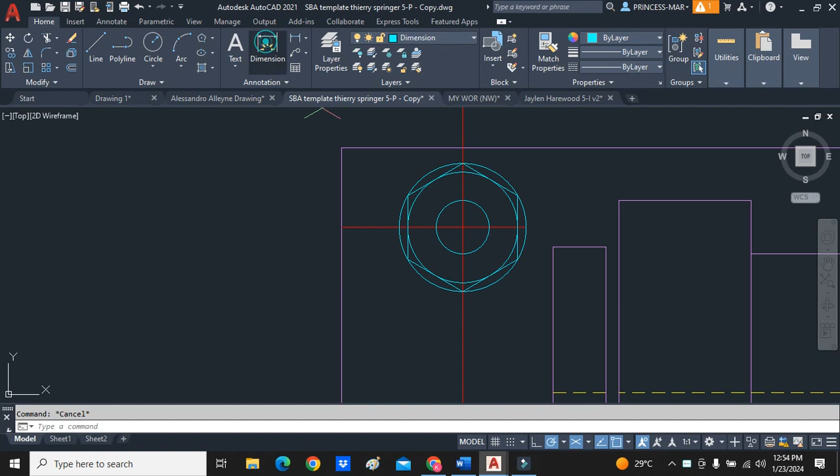The next thing is these are the center of where this hole is off. You have it here at 23 and then 15 coming down. I would probably prefer you to do a 15 and 15, or 15 by 15. Let me change this dimension.

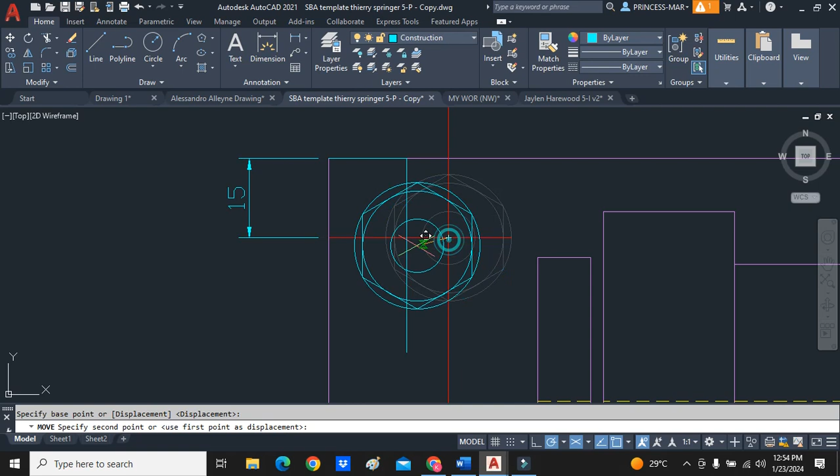All right, so we come over here. I'm going to come across 15 and bring this straight down. So we just move this. You're still watching, Terry? All right, so I want that over there 15 by 15. It actually sits good there. This actually looks pretty good.

Now this circle here is for what, Terry? What's that circle for? Washer? If that's a washer, I will probably like your washer just to be a little... should I want it bigger though? Actually, no, I'll draw it in the front view.

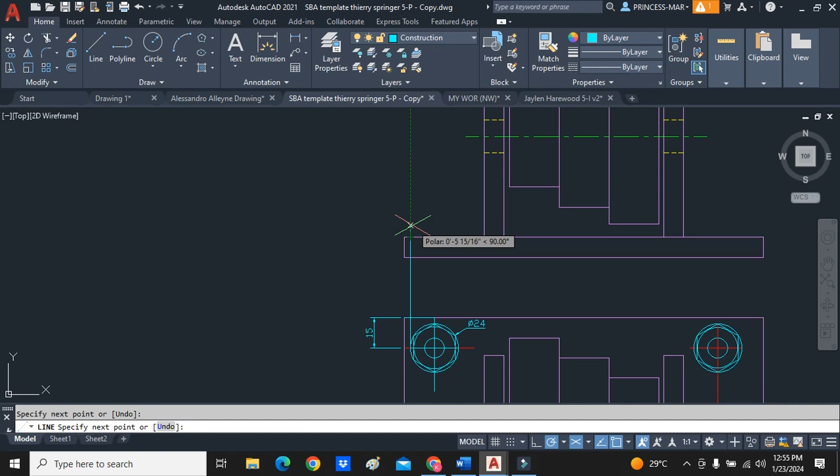So you have it at 24. Pay attention, guys, pay attention. So when we come up, your washer should be up here. 2 millimeters is a good measurement for your washer.

So I have just projected up the washer and we trim. You understand that so far?

All right, so anybody else who has submitted work, pay attention please. If you have submitted work, pay attention because this will be helpful. So now we're drawing a nut.

So you need to project up the top of your nut, and just going to draw this line here along. So we extend up the center as well. And we extend up this edge here.

So the reason that I am clicking here and then drawing the line up long is so that I can trim this one time. So I can just delete that.

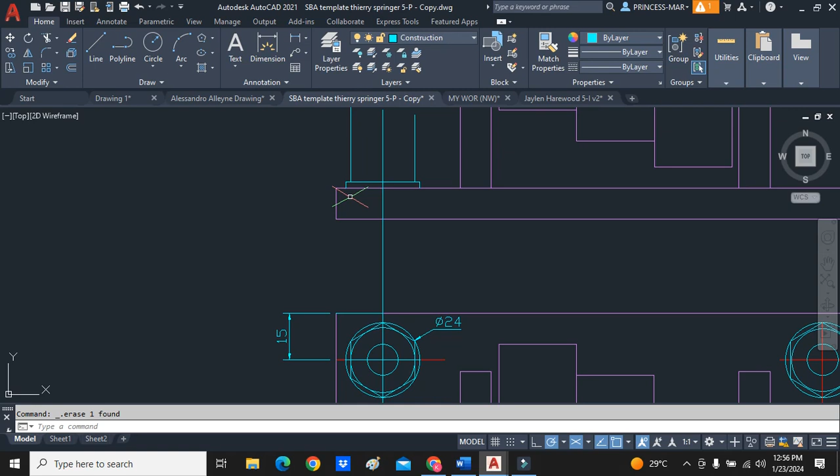All right, how high is your nut, Terry? What's the height of your nut? You don't know? So, all right, we'll try to offset it at 5. Pay attention please, for those persons who are behind. And if you have submitted your work, just pay attention to what I'm doing.

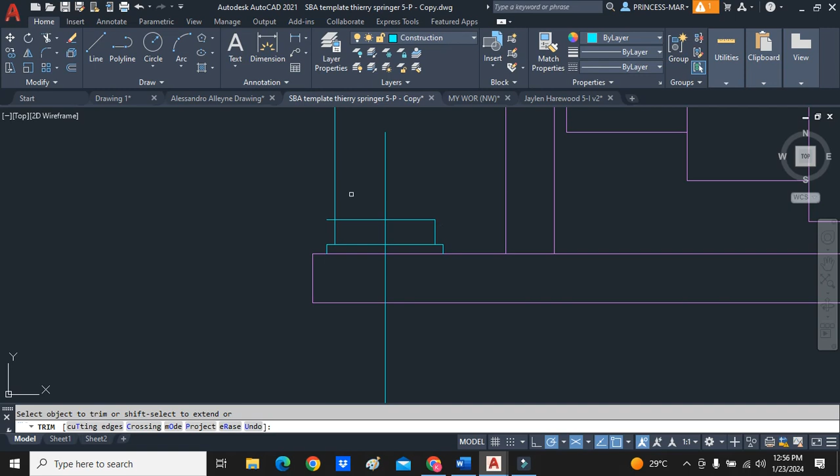All right, so I have drawn the height of this nut here at 5. It looks a little stumpy, but that's not a major problem. Let me just dimension here to the left. It's important to know these dimensions just to make sure you're going right.

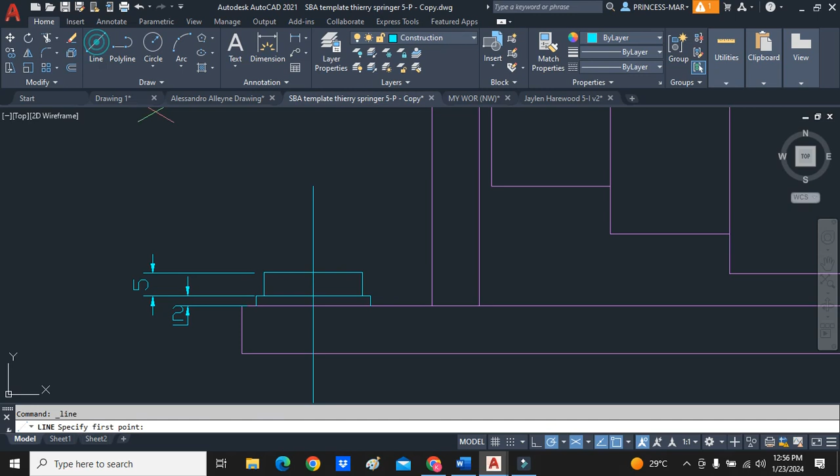All right, so now we're going to draw the bumps. Redraw this line, draw it to the center, then draw it across, and then we're going to offset 1 because this is a little low.

And we're going to do a 3-point circle in here. Left, right, 1. Nathaniel, you following? Left, right. Here, will you following? So please watch because your work has been submitted.

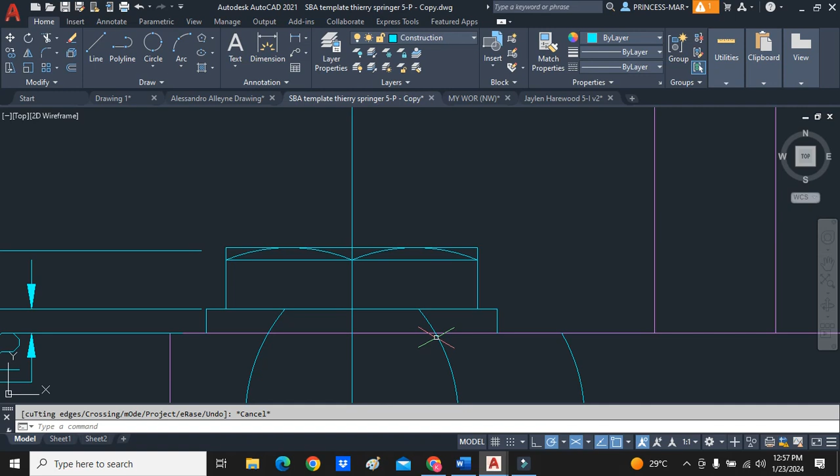All right, so we put 2 bumps in there. And I'll just delete the extra line. Oh, seems like the extra line was deleted.

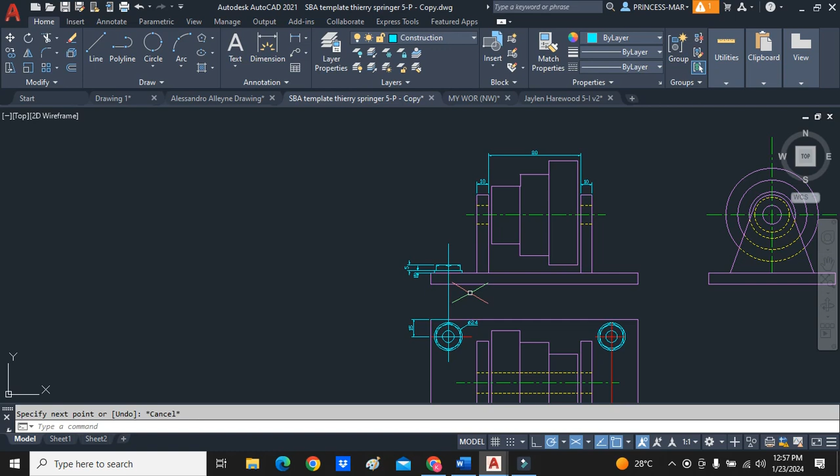All right, so that is the front view of the nut. You follow me on that? I can't hear you. All right, so watch now.

So the 2 corrections that I made, which you have to do for the others too: you are correcting the distance here, and that needs to be done for all the 3 others. You are also drawing in the view here of the nut.

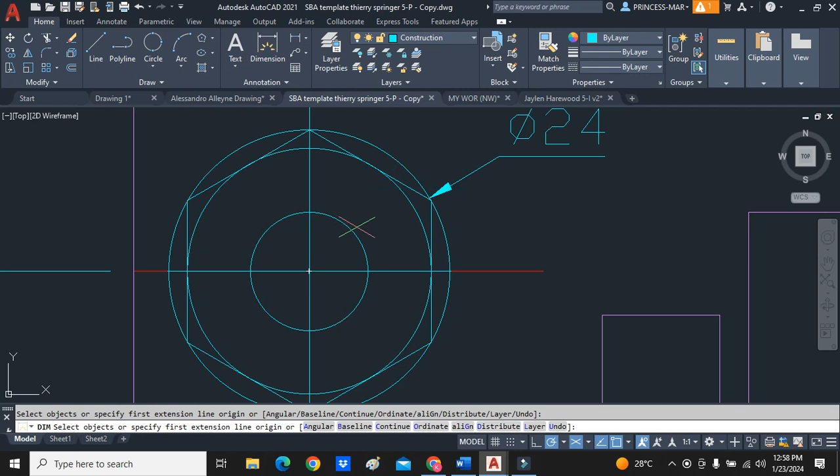Now this hole that is here, this is the shaft of the bolt that's going down. Not hearing you, Terry. All right, so 10, 10.

All right, let me do our radius 6. Yeah, I think I'm going to do it at radius 6. And have that as the thread.

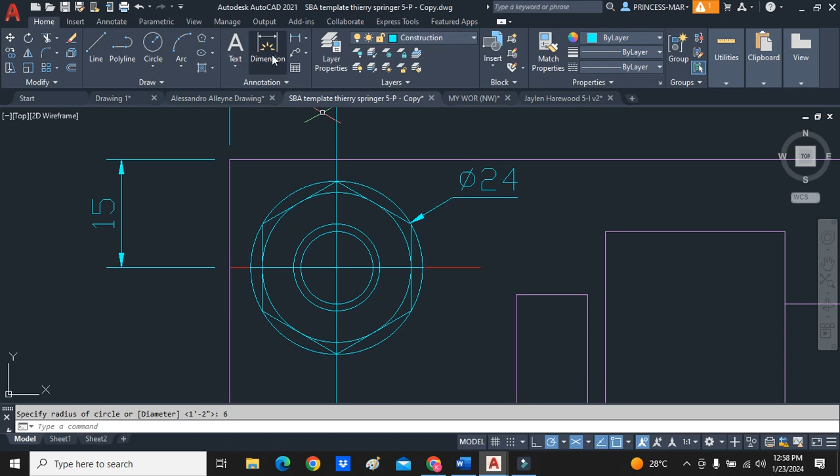So because this is a bolt, it has threads coming down. We need to make sure - y'all talking too loud, guys - you need to make sure that you have your bolt coming through the work.

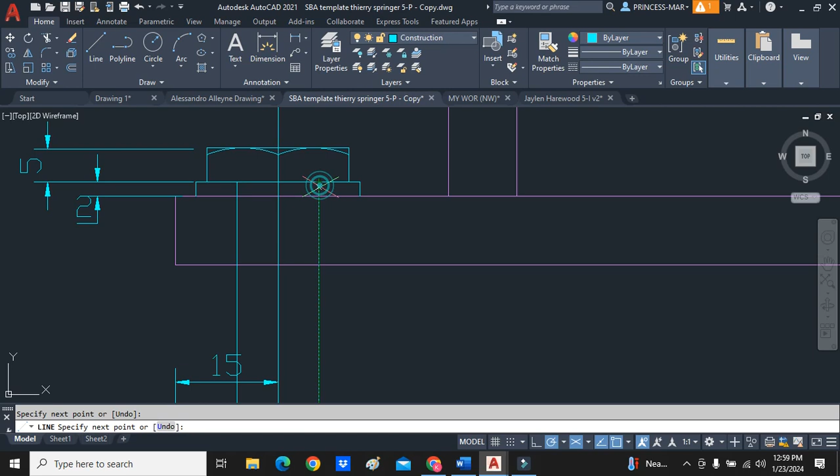So we have our bolt coming down, and then you'll just have a measurement for it, maybe how long it will be to end. So I'll just offset this, and I'll offset it at about 22. All right, so that's the end of my bolt down here.

You clear on what I did so far? So now I'm going to project up the threads. So these are the threads.

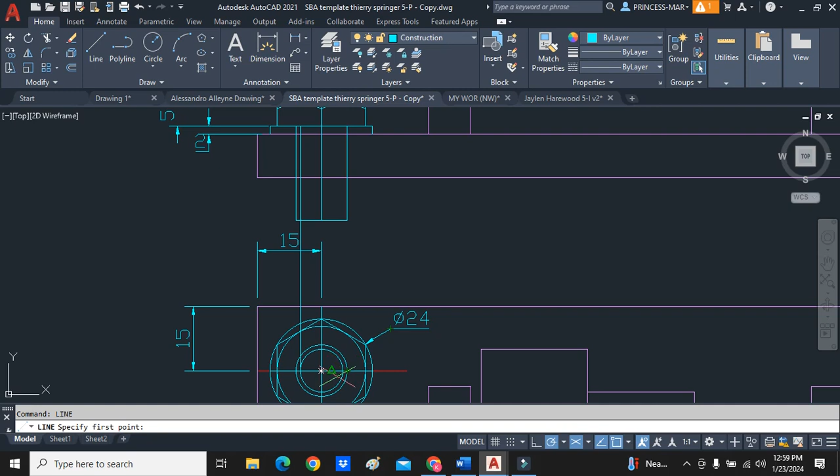And I have to do my 45, so I'm going to offset 1. And I just put in my 45 here. And now we need to trim.

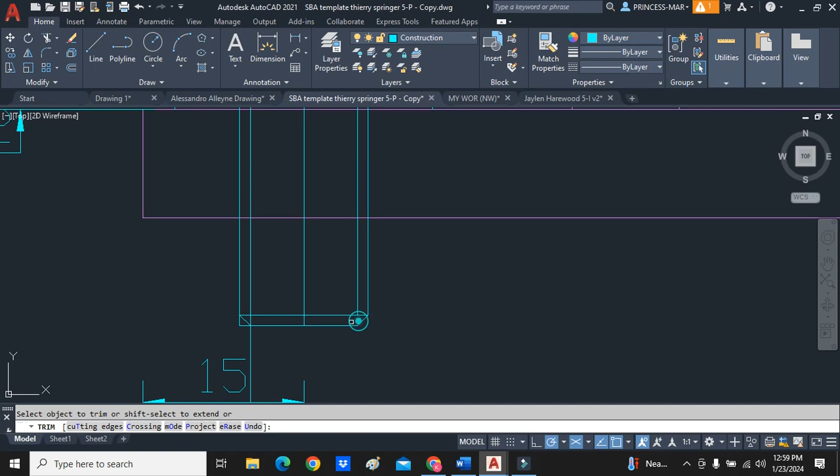All right, so that is my bolt. Everybody's clear on that? No, stop showing them that, please, Avron.

I'm explaining it here to them, so you don't need to look at that. It's all right, but look here, because then they're going to just be copy and pasting.

So this should be a center line. All right, so that's the bolt there. Over here now, so you will do that over this side.

You clear on this? So here's the second error. The distance from the front to the plan must be the same as the distance from the front to the end. So if that there is 30, we want to offset this 30 going across.

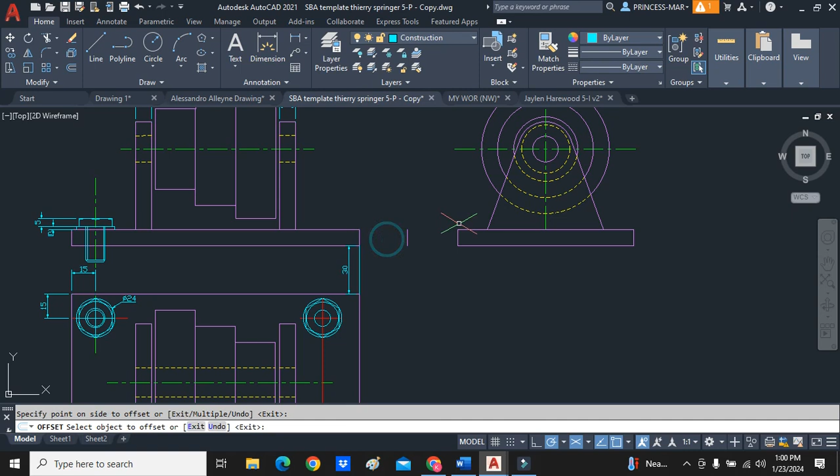So we just move it here and delete the extra line. Now it's in the correct location.

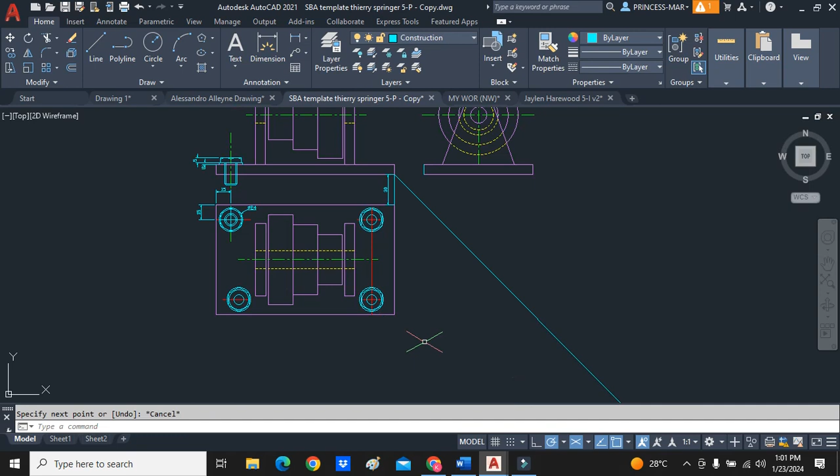Now we have to draw the 45. So we come here, 45 degree, project across, project up. So these things here should line up.

I'm going to project across the bolt now. So this is the line here for the bolt and also the washer.

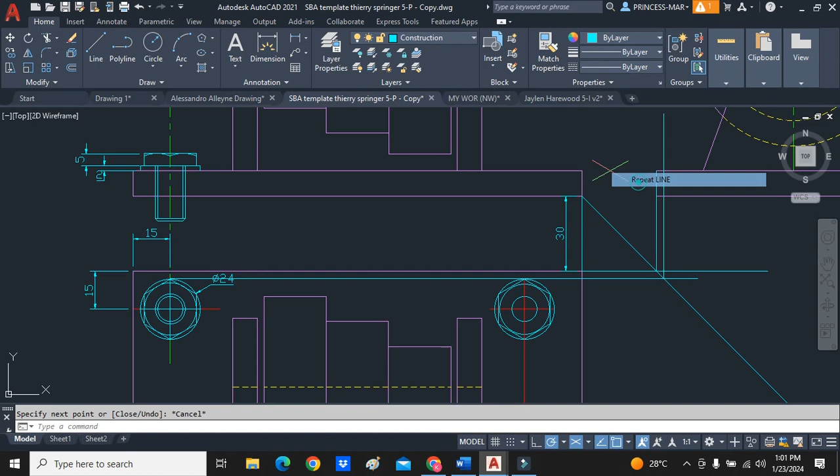You understand what I just did? So we're projecting up, all right? So now I'm going to project across my nut.

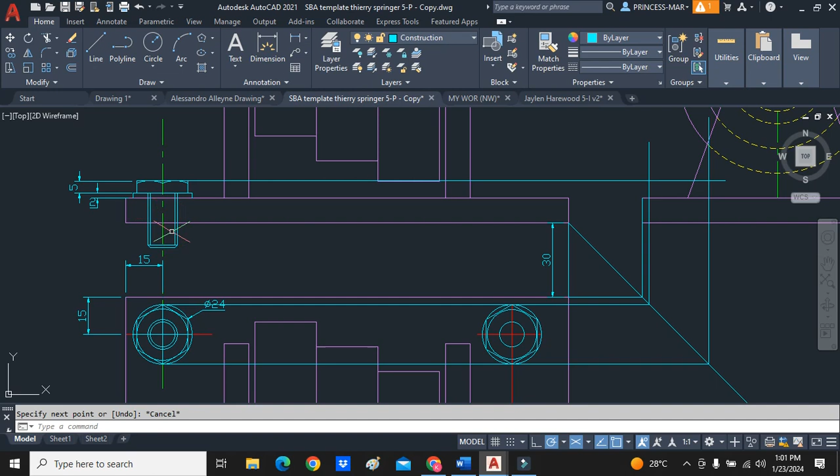So you realize that the bolt that is going down through here, you're following the bolt that's going down through here. On this front side, we can see 2 bumps. That's because we're seeing the bump over here, the bump here. But when we project across to the end, we're going to see 1 bump, 2 bump, 3.

You follow me on those bumps? If you don't follow, please say.

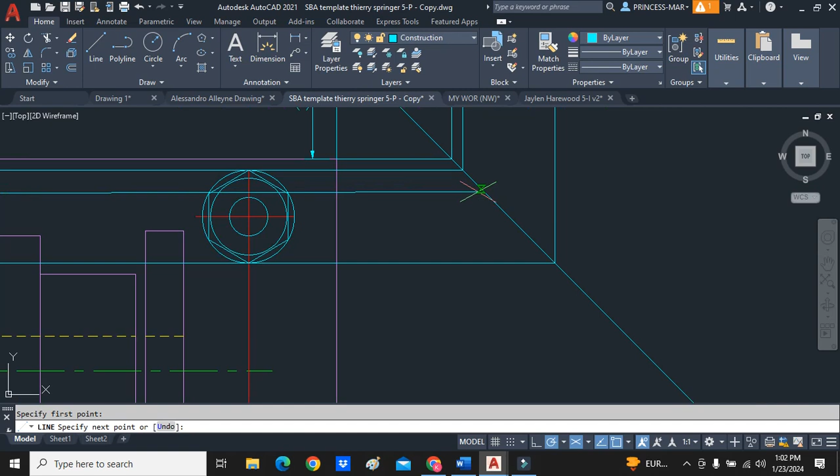Raheem, please stop talking. Remember, we're making a video, so you're disrupting the video.

So we come across here. And then we have our space for our 3 bumps.

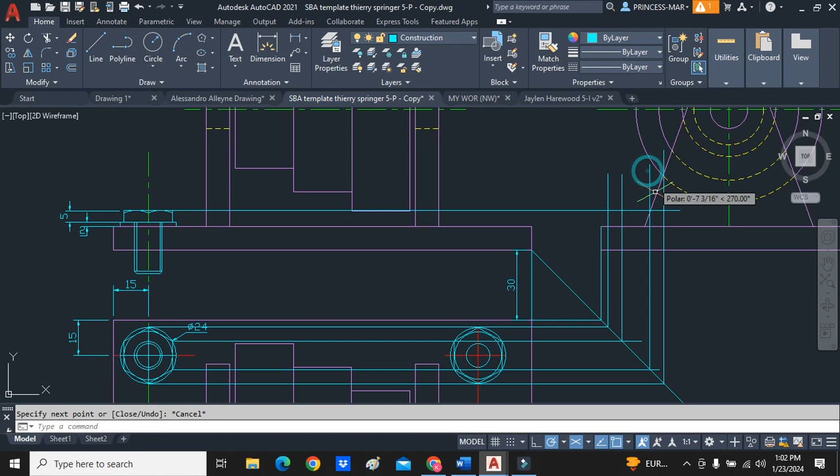Now we just need to project this across. So we go 1, project that there. And we go over this line. The reason that we do over this line is so that AutoCAD can show us the center for the actual bump.

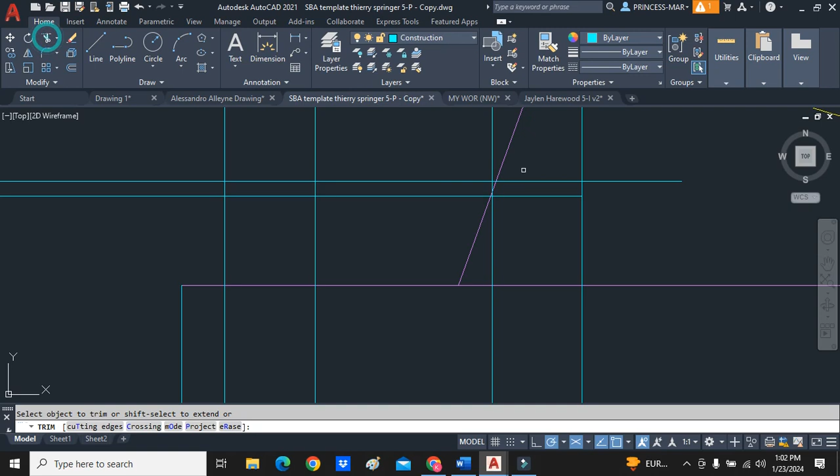3-point circle, left, right, up. 3-point circle, left, left, right, and up. What I'm showing you is helpful, Thierry?

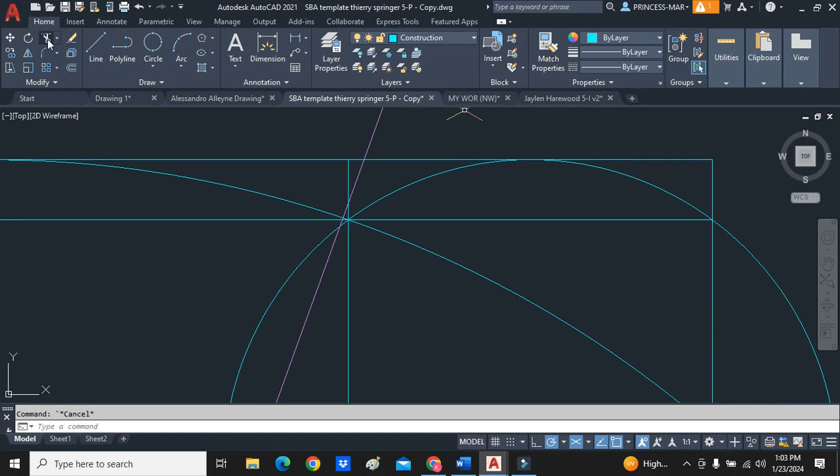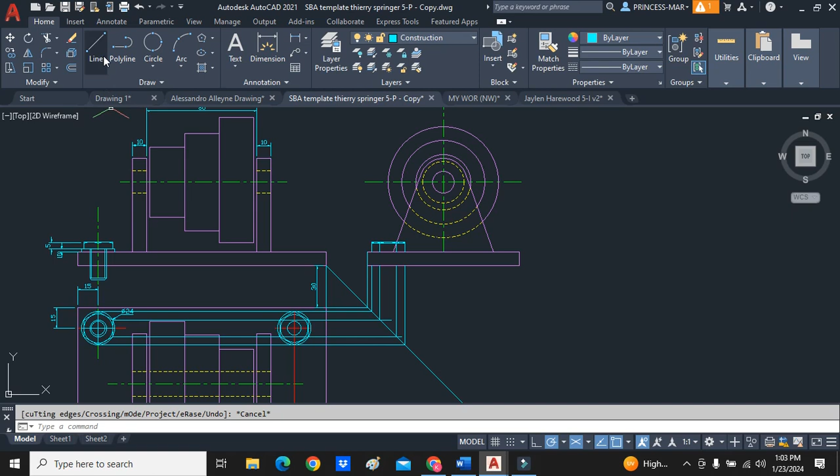Alright, so that's it. The only thing that we have here missing is the shaft which is going through on the washer. So I just need to project across the washer. Come here, 1, come there 2, and that's it.

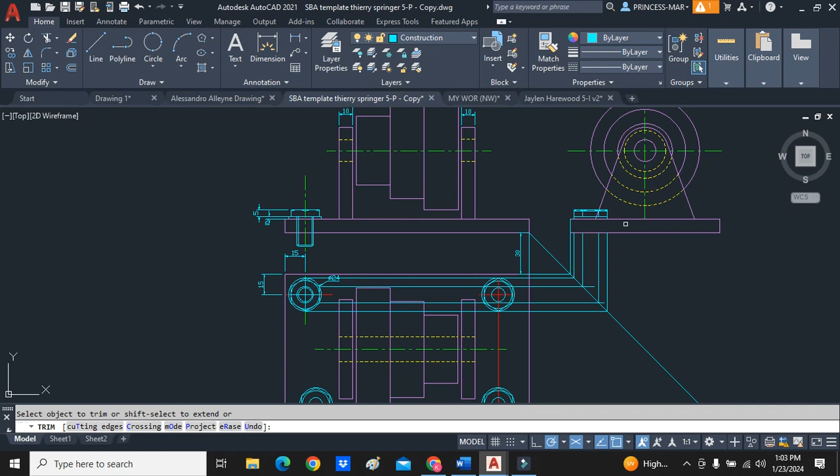Alright, so what I need you to do now, Thierry, is draw in your nuts. Change these, draw in the nuts and the bolts here, and then we're gonna go to drawing in your nut up here. You clear on this so far?

Alright, so Nathaniel, now you have to do the same thing that Thierry did, because you just have these drop anywhere. And you can't just have these bolts drop anywhere.

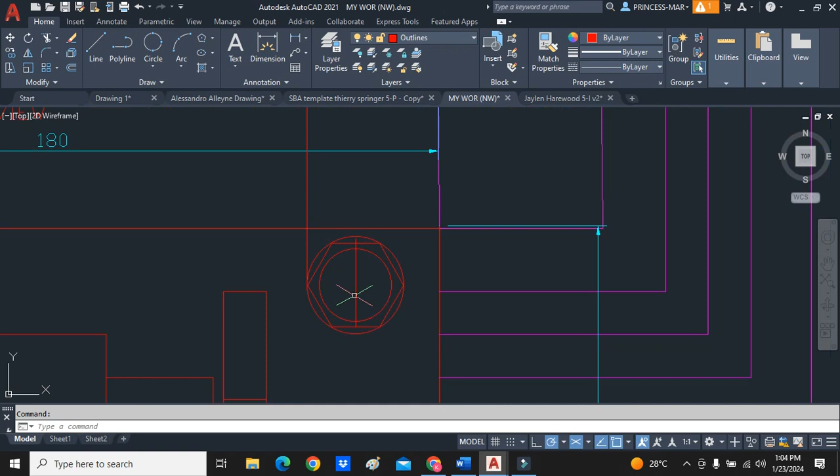So what I would suggest is maybe you offset 18 instead of 15, offset 18 in, so that that's your center.

And then we move the bolt that we're using.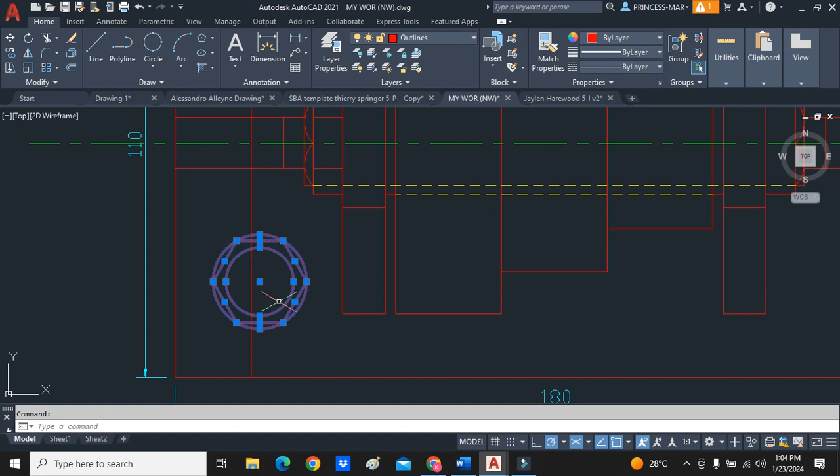Can't hear you? Well, you need to know, because in the exam you're gonna have to do a hexagon. Alright, yeah, this is forged, so we can use this.

Alright, so what I would suggest you do - and this is the problem I've found with them looking at the other paper - is that all they're gonna try to do is copy and paste what is there, instead of actually learning and understanding what they're supposed to do. So you see the problem I've found?

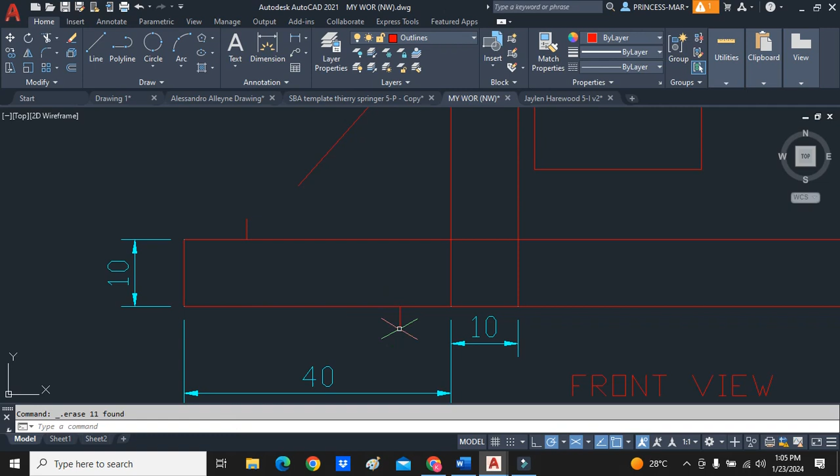Right, so when we come here now, we're gonna draw the shaft. The shaft can either be at 6 or it could be at 5. It's up to you. I did yours at 5.

Now we're gonna do the circle for the top of the bolt. I think this size here should be okay. Let me see how big this is. So that's 23. So I'll probably do your bolt at 22.

So we come here, radius, and I'll do yours at 11. So that's the size of your bolt.

And now we're gonna come here. This is how we draw a polygon, a hexagon. This is how we draw a nut, a hexagonal nut.

So you click polygon. It asks for the number of sides here. Enter 6. Enter. Specify the center. The center is here. Do you want it to be inscribed or circumscribed?

If it's circumscribed, the circle is inside of the hexagon. So that's what we want. We want it to be circumscribed like this. You understand?

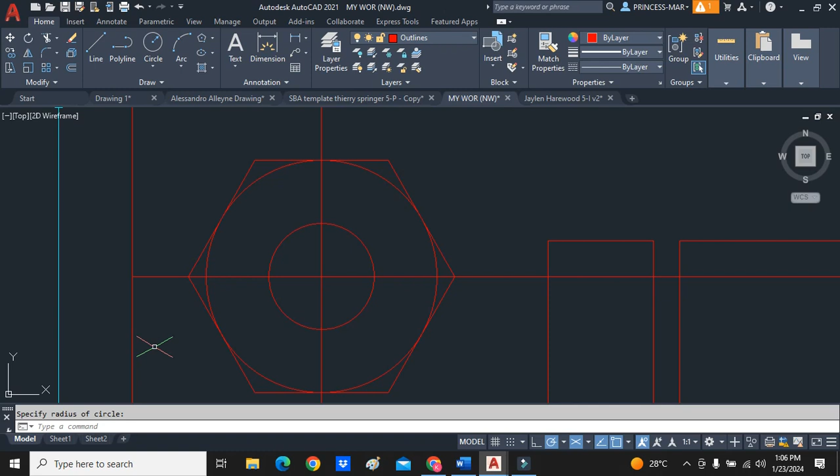The others are supposed to be still following too, because this information is important for everyone.

This looks a little big though. This doesn't look big to you? I think that looks big.

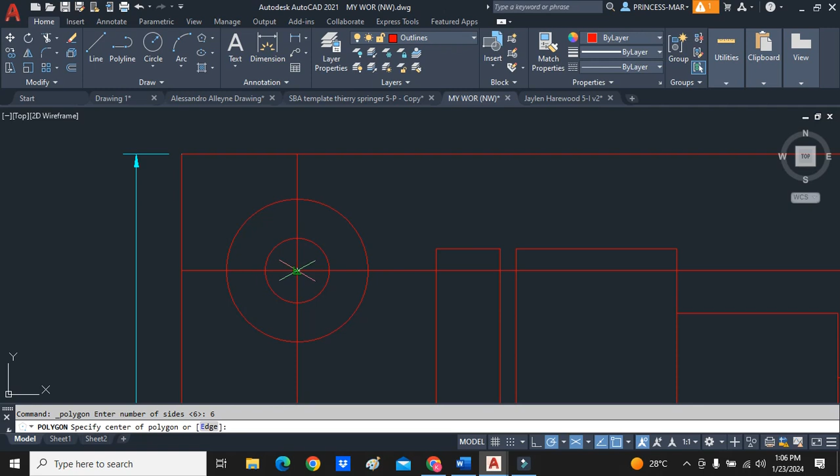I can circumscribe it and draw another circle. 6, enter, specify center. So we can inscribe it this time. Put it there. So now that we inscribe it, I'm going to delete this.

I'm going to bring a new circle for the edge. Right, so that's flush. I think that's a good size.

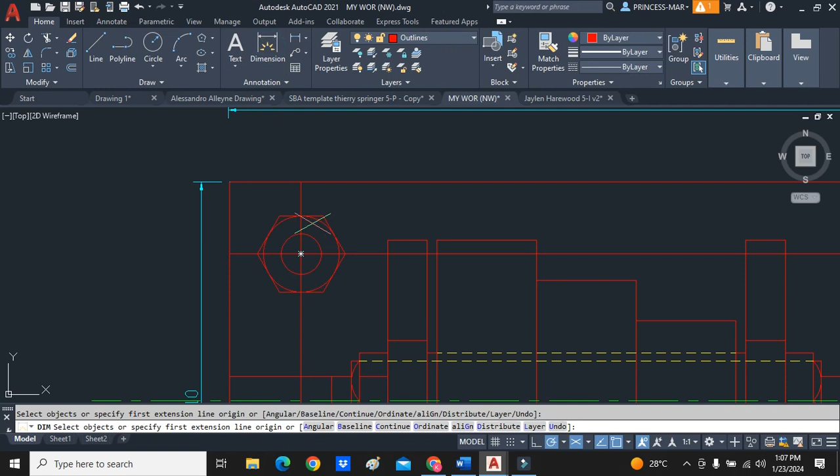Let's check the measurements. That's at 19. And then we have this here at 10.

And we can put our washer. You see how far I'm zooming in to get the correct center?

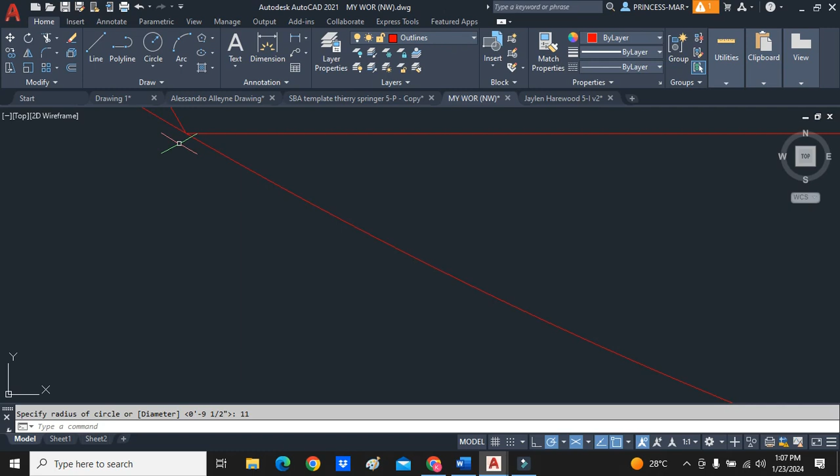I can put the washer at 10, 11. I want that washer at 11. I guess that works. I don't want it 11.

Do at 12. Right, so for this one I just put a big washer. So the washer for you is bigger.

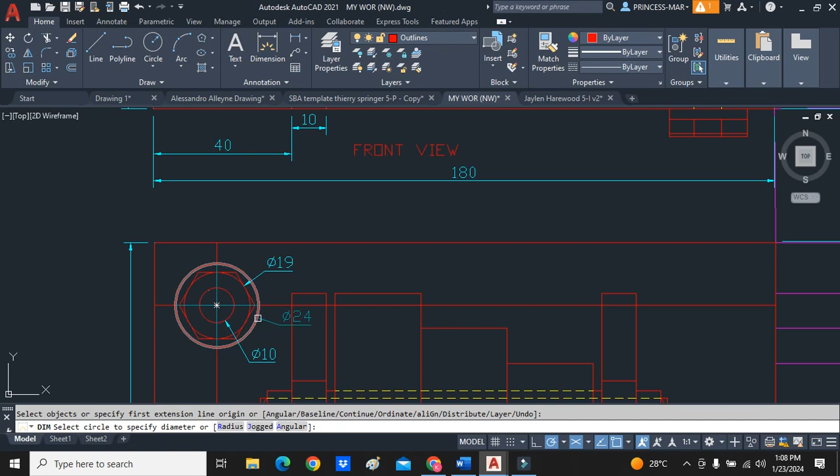And the same principle that we were showing to Yuri is you project up and you complete this view. You understand? Same thing I explained in theory. And so you will know that these bolts here are wrong, these are incorrect. Alright, stop working everyone and pay attention.

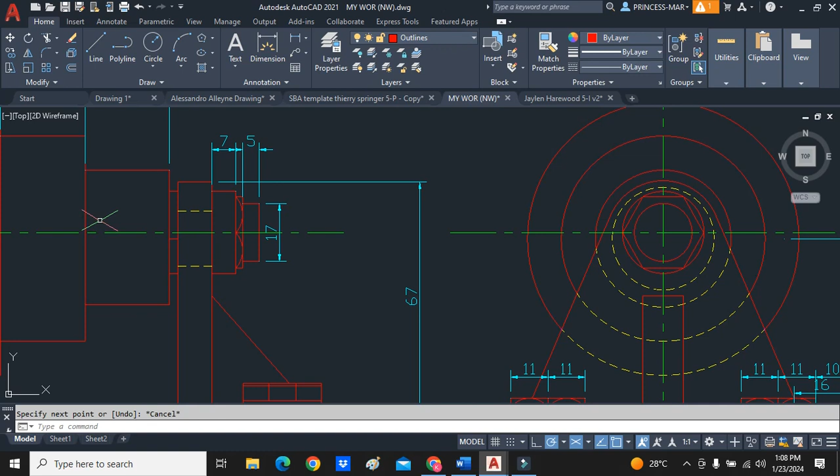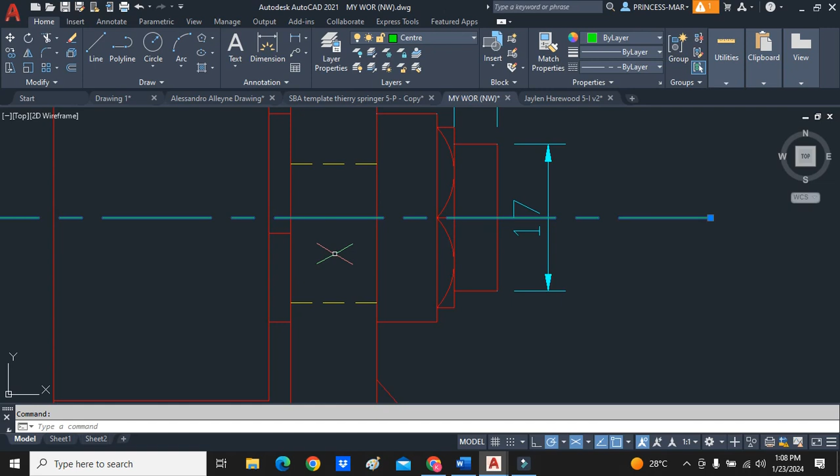Can you see that this here is lopsided? You can see it's lopsided? Like this is the hole here, but yet this is up here. You see that, lopsided? Hold up, pay attention. Wow. Even this, the center is here, but there's less space on this hole versus that one. You see that?

So these are errors that we cannot make. And these errors come back here. So let me just check. Pay attention to theory. Alright, that center is good. This one is good. Good.

Oh no, what happened that it centered that way? Like seriously, what happened that they moved him down? They probably don't like him. So we move him up. You're supposed to be there. I don't know what Nathaniel was thinking.

So what's this? Oh no. What's going on there, Nathaniel? Nathaniel, you got bare arrows on this? Oh no, oh.

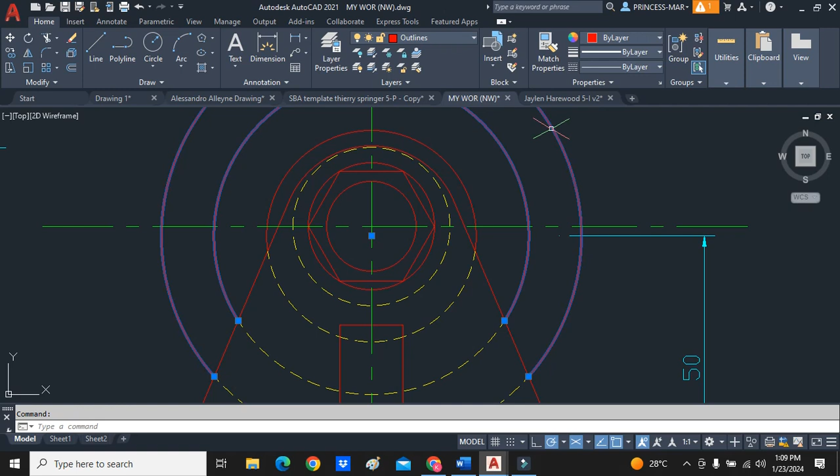Alright, so Nathaniel, my best advice for you, start from scratch. Because look at these, look at these. Look, you got two different centers there.

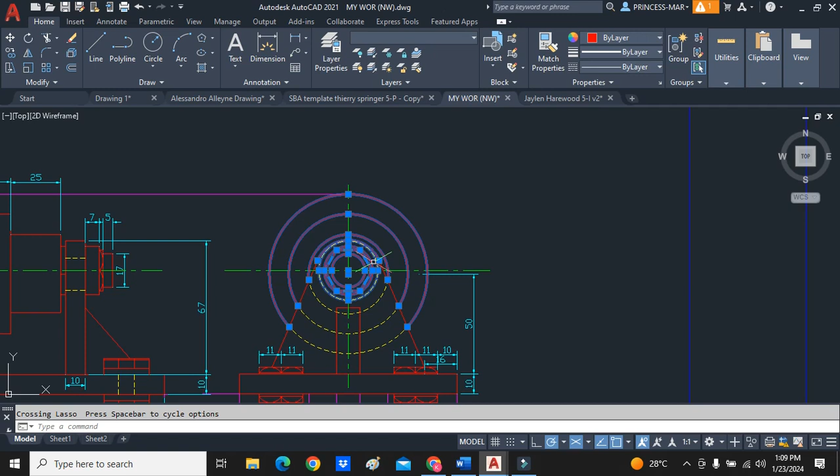Yeah, same wrong there. Alright, Harewood, let me give you some feedback. Let me check your circles first so I don't hurt my head. These are supposed to be hidden, I think. Hidden detail. Alright, so we check this. Good, good.

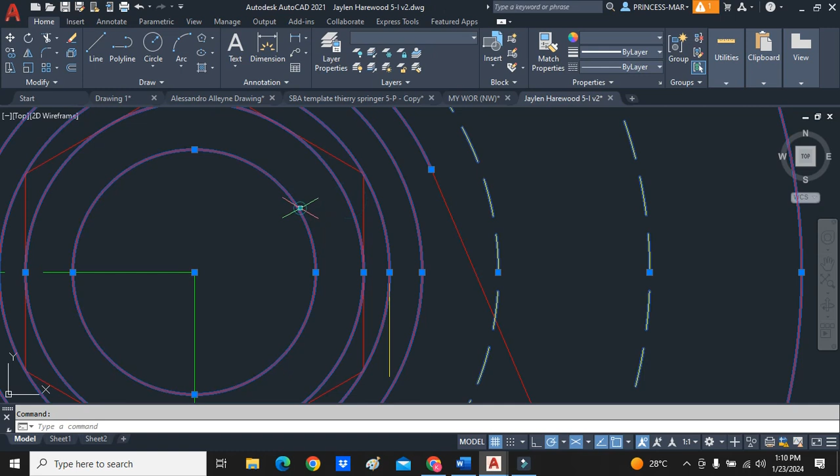Good, good. Jeez, songwriters, well done there. So Harewood, alright, that hole is nice. The nuts look like foolishness, look a little small. Make your nut a little bigger, sorry. Your nut should probably come to this circle. So make your nuts a little bigger, but this is good.

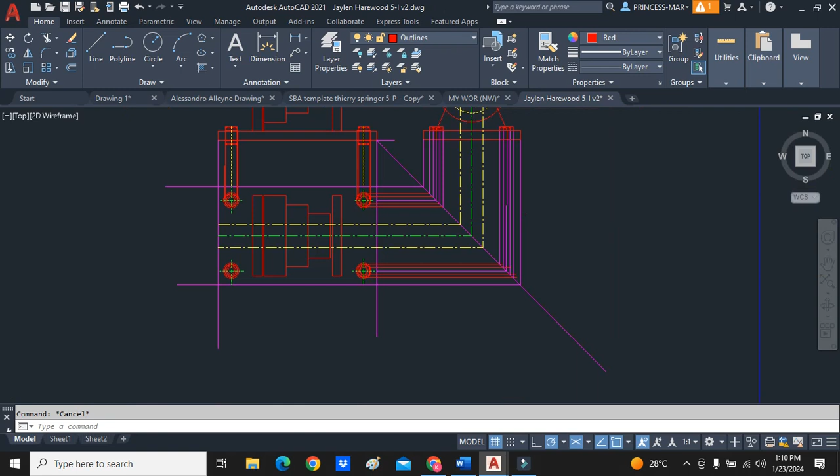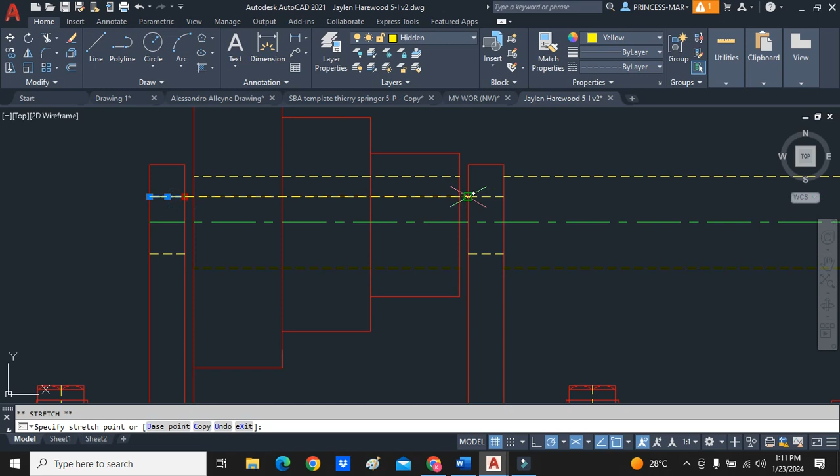Alright, pay attention. Now what Nathaniel did is, I think Nathaniel actually drew the figure back to the correct measurements. So let me explain this part here. Pay attention, sorry Harewood. Jaylen actually did it to the correct measurements, and you realize that the pulley has a big hole in it. Why does this look off?

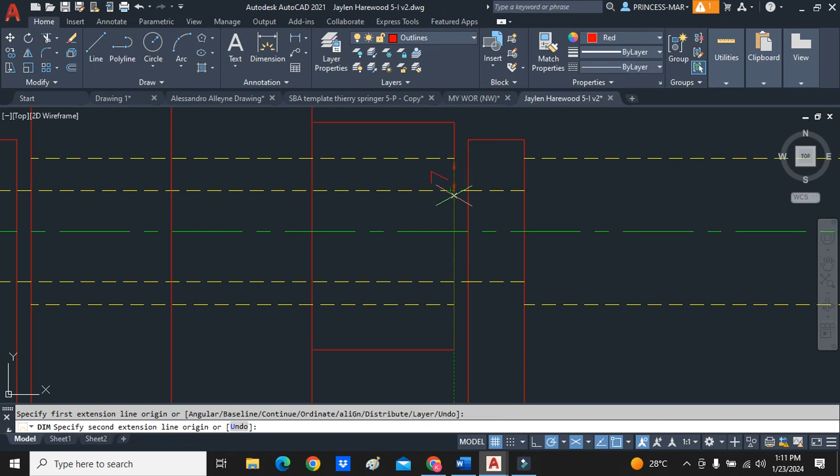Oh, that's 6, this is 4.

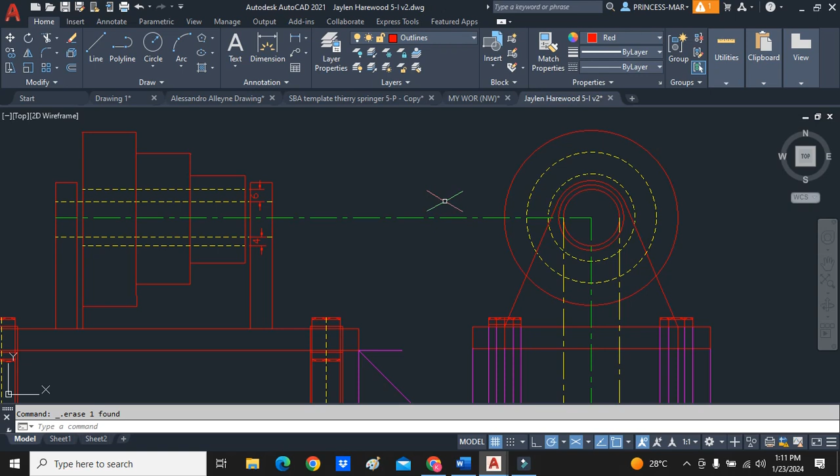Alright, so look here, Win. Delete this, we go back to the basics for the question. I want you to make sure that the basic measurements are correct. Once the basic measurements are correct, this can be correct. So you draw over here first, make sure these are correct from the CXC question I gave, and then project across. So these are incorrect.

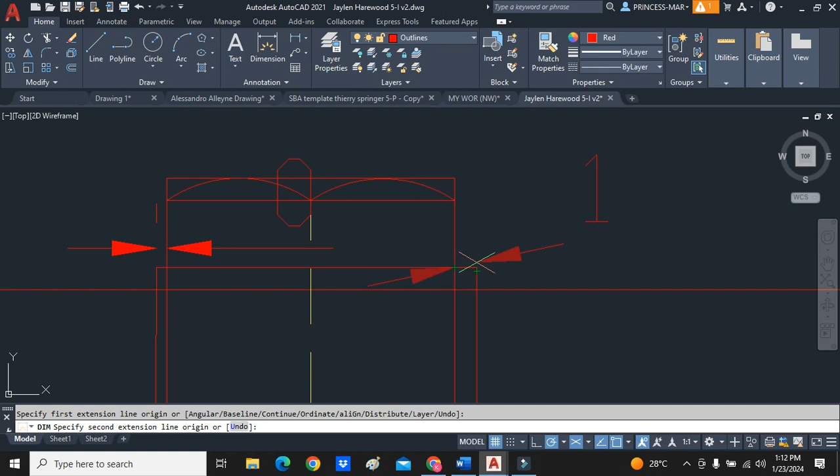You have to change these washers. Look at this, you realize that over here is small and over here is big? You see those two different measurements? You see how small this piece is and how big that one is? Look, yeah, so just delete that.

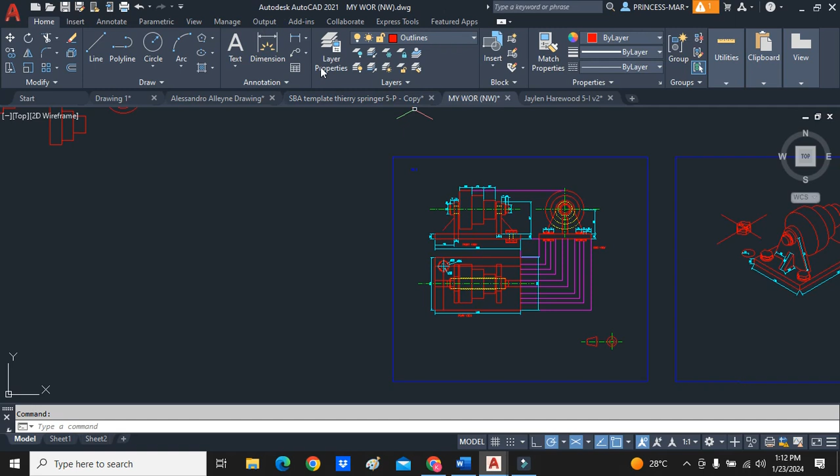So you're going back to the start here with Nathaniel, you're going back to the start as well, and then we're going forward from there. I think you still have some incorrect measurements on this, Thierry. You're missing a hidden detail in here, Thierry.

I think this might be the hidden detail. Just check radius 15, the bushing is radius 15. Avron, check there for the bush, the diameter or the radius of the bush. Is it radius 15? Look at the paper quickly, please, the paper that you've been copying from for your whole day. Quick, quick, quick, yeah.

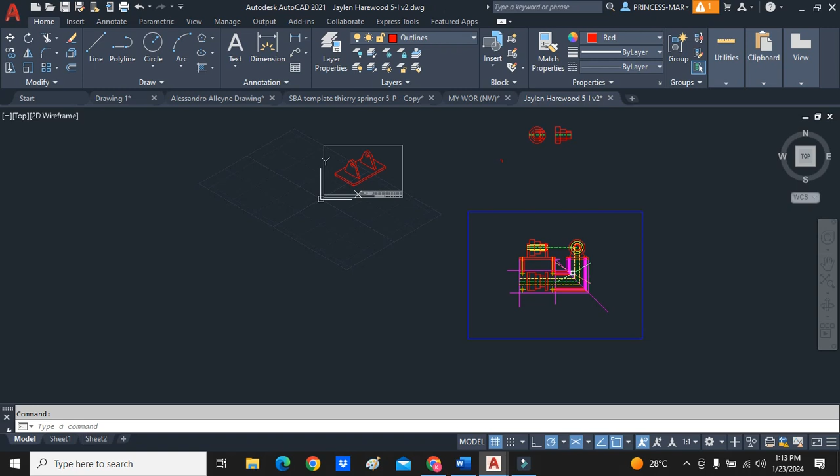I'm glad that you started this, nice. Radius 30 for bush, right?

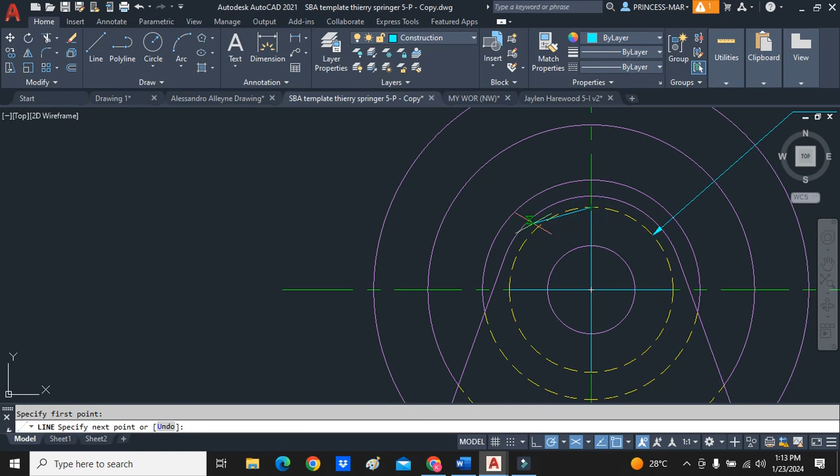Alright, so look, no look. What Thierry has here is the base drawing. Pay attention fellas, this hole that is here, radius 30, that must come across here in the pulley. The pulley has a hole in it, radius 30. See that? So now the pulley has that hole radius 30.

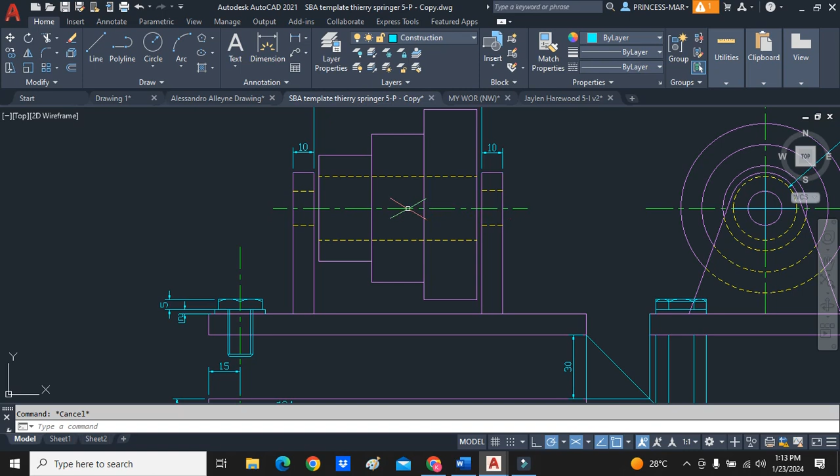This is one of the conditions for the SBA. The pulley has a big hole in it, you understand? When we put the shaft here through the pulley, pay attention everyone, there is a big space here. Let me just show you.

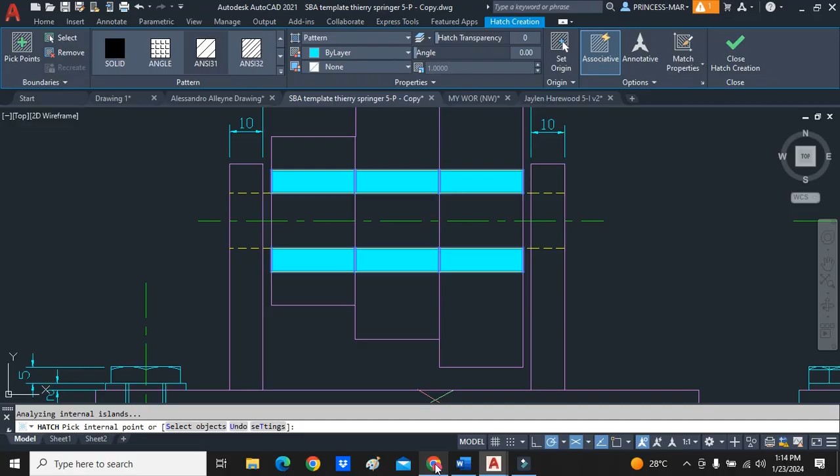You realize that there's a space here between the radius 30 and the 16 for the bolt? You understand that? So what we are doing is we're putting a part called a bush in here. So a bush is something that looks like this. Draw online.

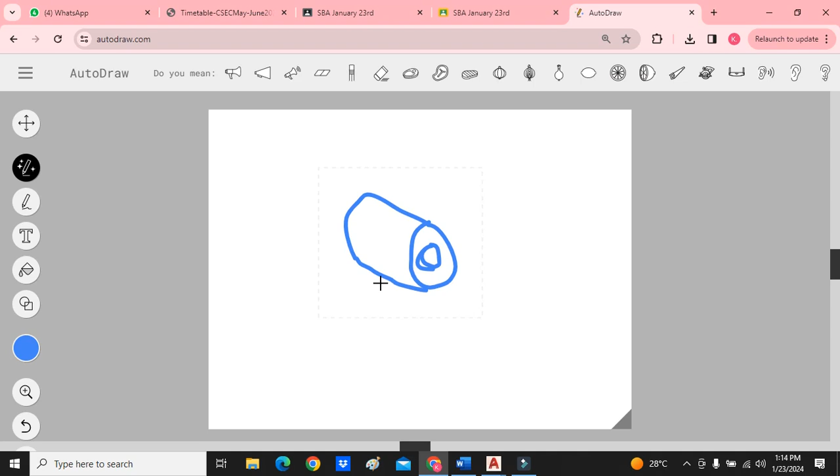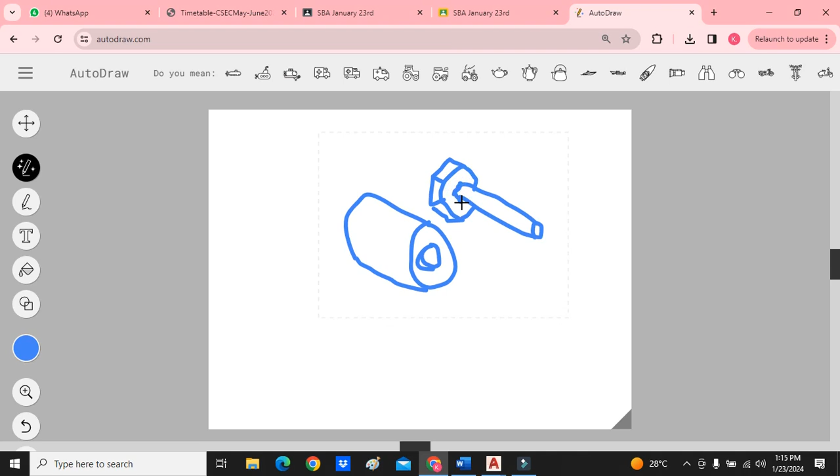All right, internet seems to, okay, so the bush looks like this. It's a cylinder with a hole in it, and what it does is it acts as a spacer. You understand that? So what we are doing is we're taking the bolt and we're gonna have the hexagonal head there. So this hexagonal bolt is too small for the actual bracket.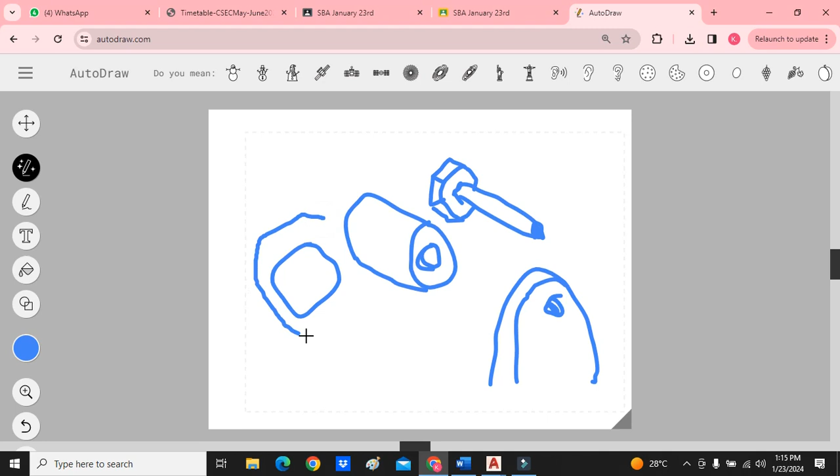You understand this? The uprighty bracket. So the whole of this, these two holes here line up. But when we bring the pulley now, the pulley has this big hole in it that the bushing has to go in. And once the bushing fits inside of the pulley, you then push the bolt through the bushing. You understand that?

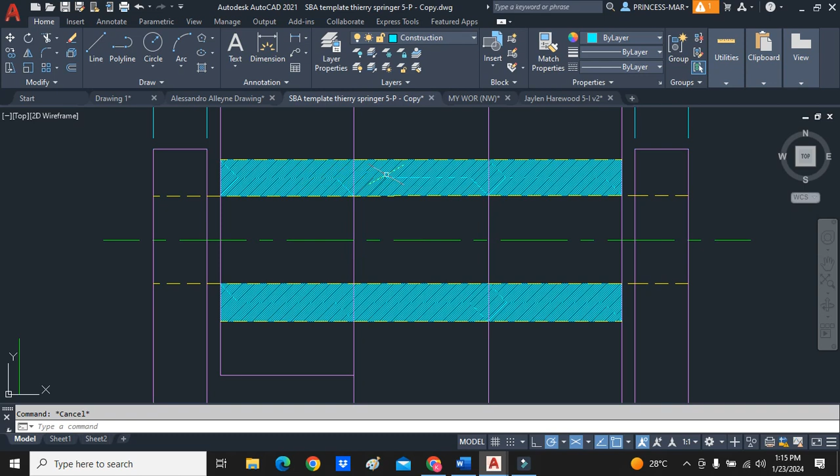So when we go back to the drawing now, when you come to complete your drawing, you have to make sure that you section the bushing because that is going to be cut depending on your cutting plane. So last tip that I'll give you, last thing I'll say: project down your lines and project across. This ensures that your measurements are correct. You follow me so far? Alright, I'll stop the video.